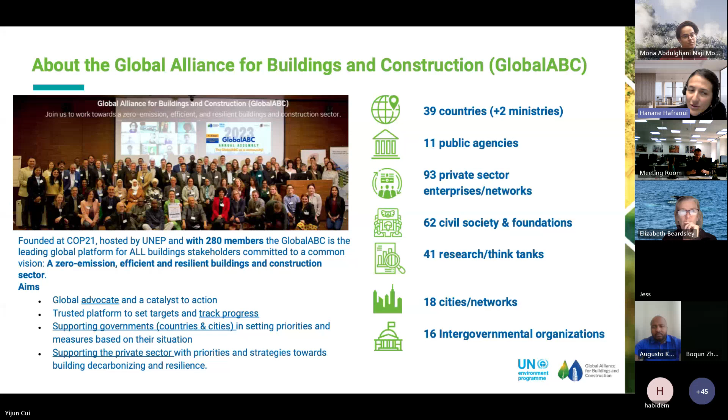Thank you, Hanan, and thanks everybody for being here today. I'm happy to be here talking with you about building materials, and just to make sure we're all starting from the same place: why are we talking about building materials? As Hanan mentioned, the sector contributes quite a lot to the emissions. You can see here we have about 37% coming from the building sector of emissions to the global carbon emissions.

Both operational and embodied. Embodied emissions are about 10% right now, and we are moving towards decarbonizing the sector. We are focusing quite a lot on the operational emissions, but we need to also decarbonize the embodied emissions, and that means we need to decarbonize the building materials.

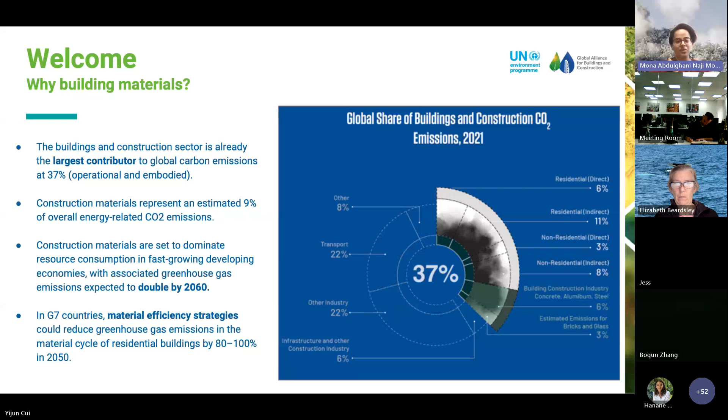And so this would include quite a lot of work, but with that in mind, on the next slide, you can see that the GlobalABC works with the Materials Hub to work particularly on decarbonizing of the building materials. And what we do mostly in buildings is really about knowledge generation, dissemination, and implementation.

And the next thing is you'll hear quite a lot about the Avoid, Shift, Improve framework to construction materials, so we'll be going through that. But I also want to flag that in our conversation, we are not only talking about the climate, we are also talking about a just transition. We're talking about health concerns, economic and social concerns, and solving these considerations, including as well the integration of biodiversity.

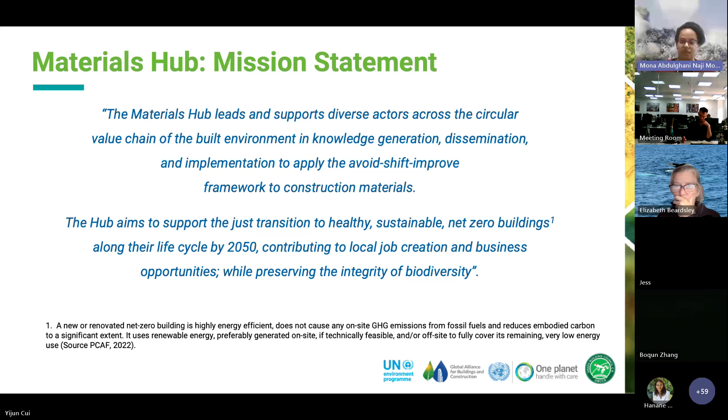On the next slide, you will see that the Materials Hub work looks at about 4 different ways of doing things.

Next slide please. There you'll see that we do quite a lot of ad hoc training, and it's really about setting a unified vision for all.

Sorry, I see there's a note in the chat about the clarity of the voice. Can you hear me okay? Okay Mona, I think the connection is not that great, it's the Wi-Fi I think. Let's try and fix that one second.

All right, so I think that fixed, but let me know if that still persists. I think we should be able to...

Vision for all the actors in this sector, and then to advocate and identify synergies between the different actors, to ensure that our work is aligned with the SDGs, as well as to identify and pilot solutions and tools and educating the community around that.

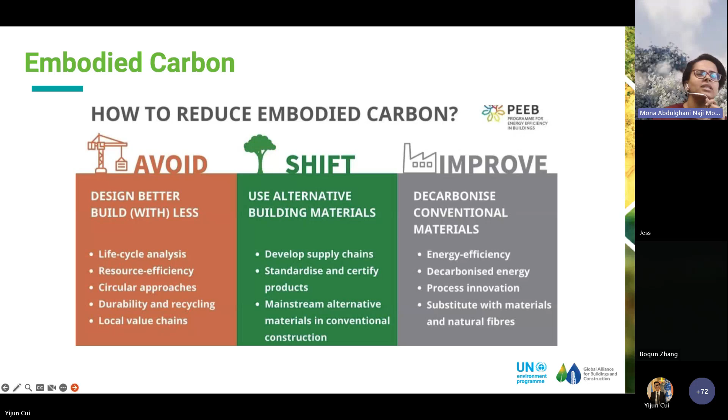So on this work, in the next slide, you'll see that the Materials Hub focuses their work in 3 areas that align with the Avoid Shift Improve framework. The first is the work on a circular built environment that we do with the Ministry of Environment in Finland, RMIT University, and Habitat for Humanity.

The second is focused on a whole life cycle policy approach to buildings, which we do with the Department for Energy Security and Net Zero and the World Business Council for Sustainable Development as co-leads. The last one is focused on bio-based materials, where we work with the Center for Natural Material Innovation and the Center for Engineers in Argentina.

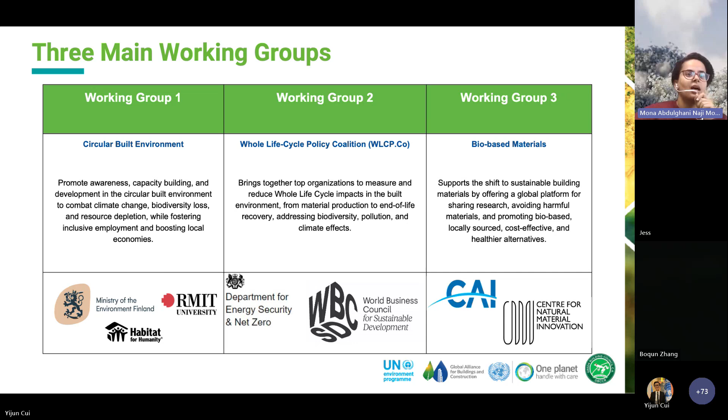For starters, we have an upcoming webinar that's going to focus particularly on data ecosystems for near zero emissions and resilient built environment. At the same time, we're also working to put together a compendium on bio-based materials, and we've already put out a call. So if you yourself are also working on bio-based, and that also includes geo-based materials, please feel free to share with us.

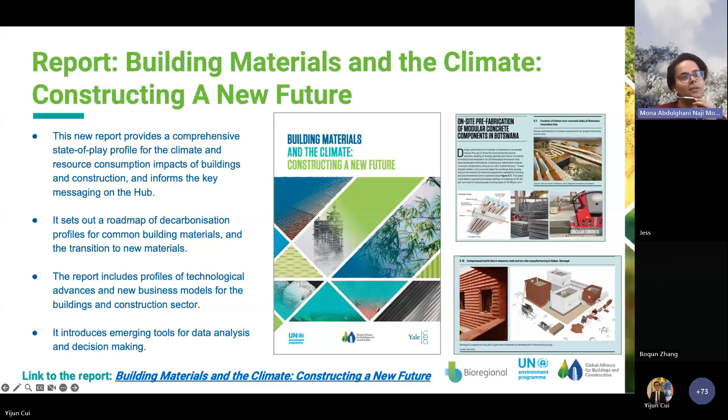This is also the link to the report for you to take a look. On the next slide, you'll see some of the key messages from the report. The main one being that building materials are set to dominate climate change, and that's why we think this work is useful, because it's going to help us reduce the emissions of these materials.

Between 1995 and 2015, the share of emissions from producing building materials alone grew from 15% to 23%, and it continues to grow still today. So if we continue under a business as usual scenario, the share of embodied carbon emissions from buildings and construction, which is mainly going to come from building materials, is actually projected to double by mid-century.

So that's where this work is looking at. On the next slide, the idea is that we are going to look at the carbon impacts of these materials across the whole building life cycle, working with different actors. Here you see a visualization of sources of embodied and operational carbon.

You can see the life cycle stages highlighted here, and the key message being that the decisions we make earlier in the life cycle of these buildings are the decisions that have the highest impact as we move forward.

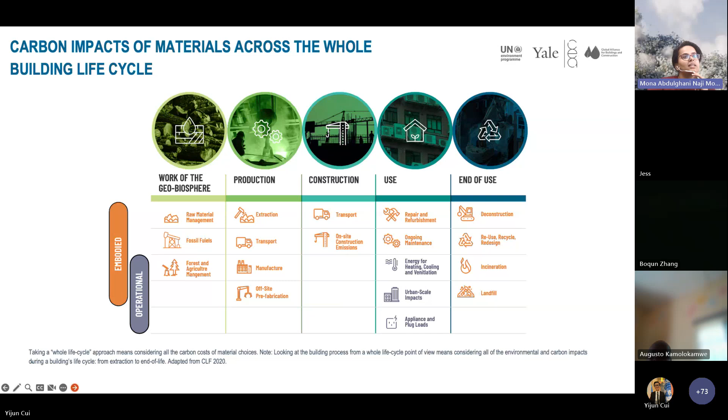Finally, on the pre-last slide, you'll see that we are talking about this avoid, shift, improve strategy. That's the goal we're trying to move to by 2050 and 2060. There is no silver bullet to where we are today.

So making sure that we are avoiding waste and building with less, and avoiding the extraction and production of raw materials through galvanizing a circular economy, which means we use better data-driven design and strategies such as designing for disassembly, which could decrease about 10 to 50% of GHG emissions, while maximizing the reuse and recycling of buildings.

Renovation right now, for example, generates 50 to 75% fewer emissions than new construction. At the same time, when we're looking at shifting to regenerative material practices whenever possible, we still have to make sure we're using ethically produced low carbon, geo and bio-based building materials.

That could include everything from sustainably sourced bricks to timber, bamboo, agriculture, and forest biomass, helping to incentivize biodiversity as we do that. This shift towards properly managed bio-based materials can also lead to compounded emission savings of up to 40% in the sector by 2050 in different regions.

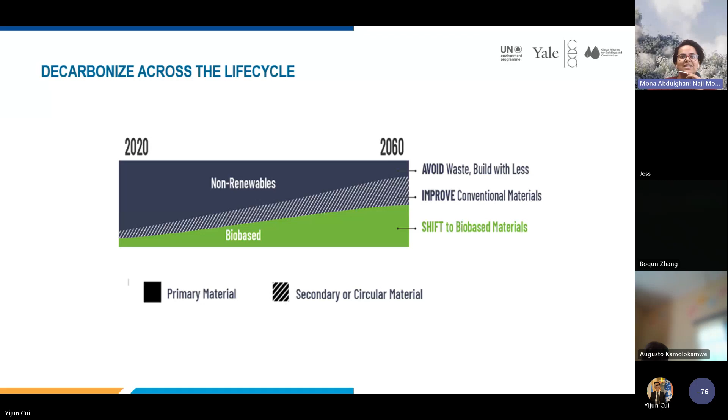Finally, we have to improve conventional building materials and processes through decarbonization efforts in production and increasing recycling. In the next slide, you'll see the same figure of avoid, shift, improve, but this time looking at a variety of different materials. This is one projection of where we could be moving into 2060.

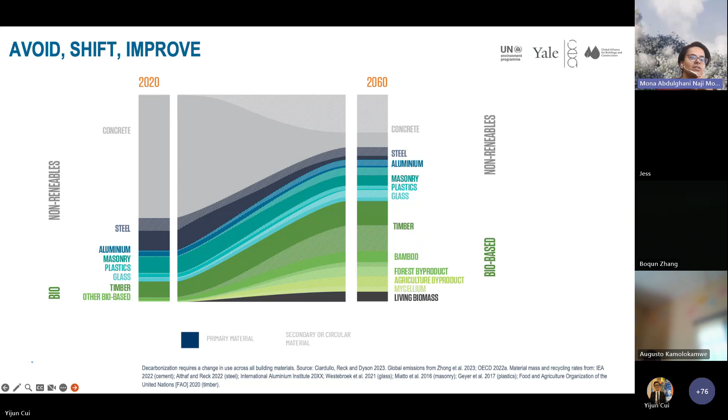So last but not least, we're focusing on the shift strategy in the final slide. We are looking at shifting towards different building materials. Today, we are going to be looking at a material that falls under earth masonry.

Just to flag overall, earth masonry is a high quality and low carbon material that still requires development and adoption of local standards. That means there's still quite a lot of work that needs to be done at the building codes level and the standards we're looking at, so we can promote and scale the high quality earth masonry use in the sector.

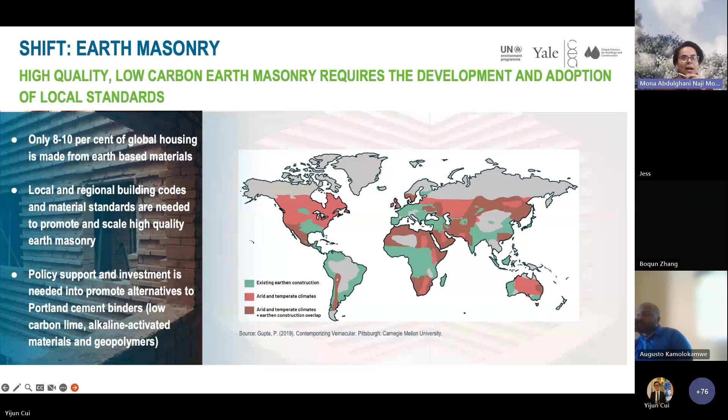Many thanks, Mona, and thanks also to Hanan. Your introduction and description of the work of Materials Hub and GlobalABC is a really good context setter for what I'm going to be talking about today. So just while I share my screen, let me get the slides up.

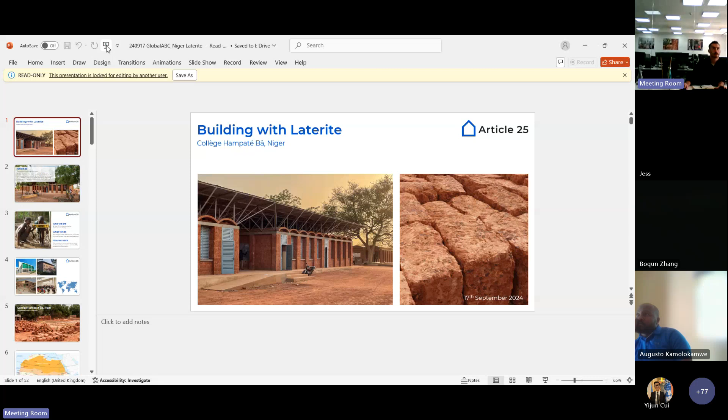Hopefully that's visible to everyone, but someone please flag if not. So I'm going to be talking about a project I've been working on for the last four to five years with Article 25. That project is at Collège Hampaté Bâ in Niger, in West Africa, and it's an interesting example of material use.

So there's this kind of stone called laterite that we use to build the building from, but also in terms of passive design, the way that we use first principles in the design to reduce reliance on aircon specifically, and the power usage and the operational carbon that accrues over time in future.

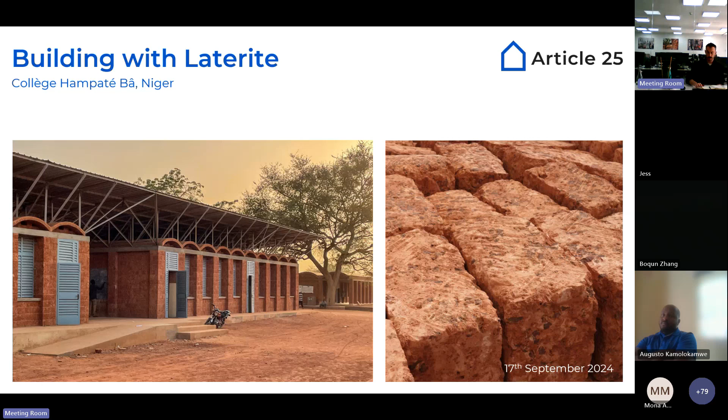So first off, a very quick introduction to Article 25. We're an architecture office, we're also a charity, and we're based in London, and we work in humanitarian development around the world. The name comes from the UN's Declaration of Human Rights, which pertains to every person's right to a standard of living adequate for good health and well-being of themselves and family, and that includes shelter as well as clothing, food, medical care.

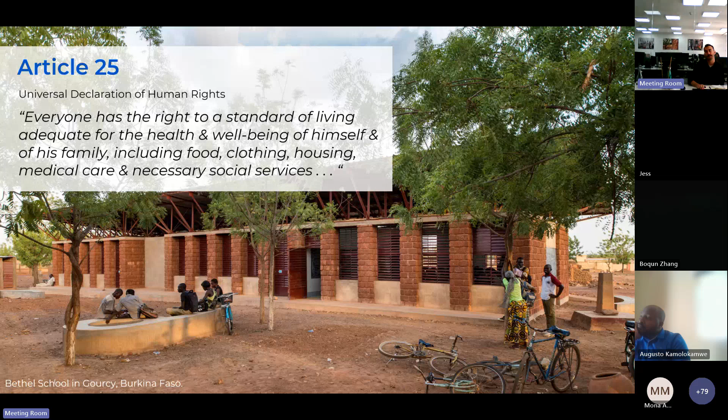So all of our work focuses on those things in one way, and many in several ways. As I mentioned, we're a humanitarian architecture charity. In practical terms, we design and then project manage the construction of healthcare facilities and educational facilities, and sometimes also housing in places where they're greatly needed. Whether we're working with a primary school in rural Africa, or whether we're working with the UN and government bodies, we always have a very close relationship with the community that we're building for.

We don't parachute in ideas that we fancy that day of the week. All of our projects are really derived from the people who are going to use the buildings.

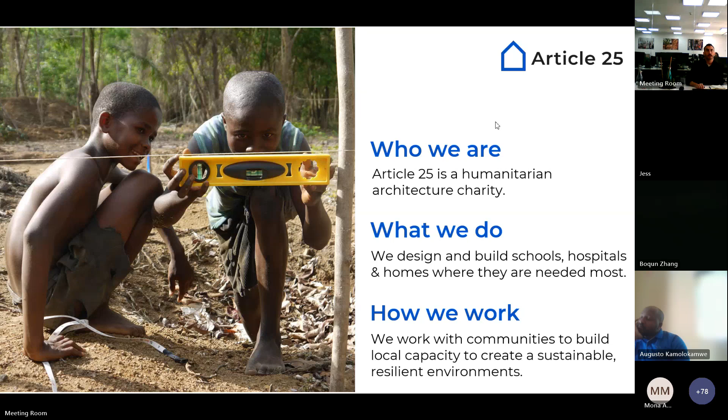So Article 25 has been working for nearly 20 years now, since 2005. We've completed over 100 projects. These range greatly in scale.

Just to give you some examples of things we're working on at the minute, we have a new national hospital in Montserrat in the Caribbean, outpatient buildings in India, orphanage buildings in Tanzania, a kind of high-tech research laboratory in Nepal. So our work really crosses from really small scale things to larger, and each presents its own challenge.

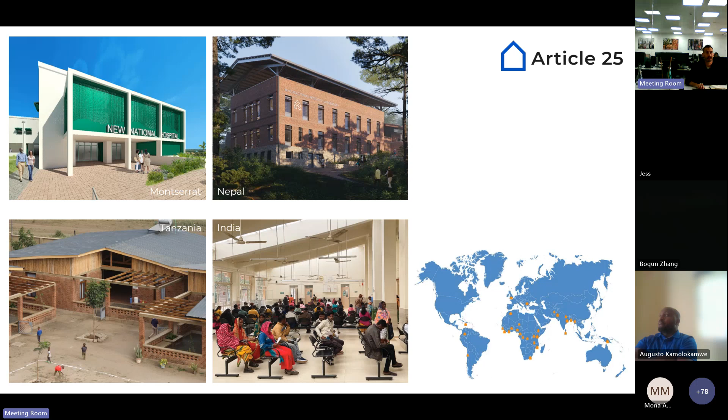The one I'm going to be talking about today is interesting for a number of reasons. As I've already mentioned, we're using this material laterite, and very early with the client, we made a few decisions about this project, and we wanted it to be an exemplar project, one that in certain ways we hoped could be emulated, not just in Niger, but across the Sahel region.

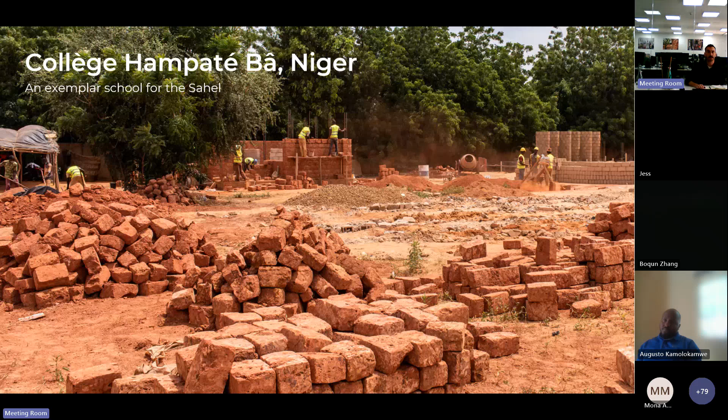That's the kind of arid southern parts of the Saharan desert in West Africa. And we wanted it to show ways of reducing the carbon use in buildings and also improving the climatic performance, so that the building itself would be a more comfortable place and use less energy operationally. So, these are grand aims, and I think in some ways we succeeded. In some ways, we've got a lot to learn. I'll come to that at the end.

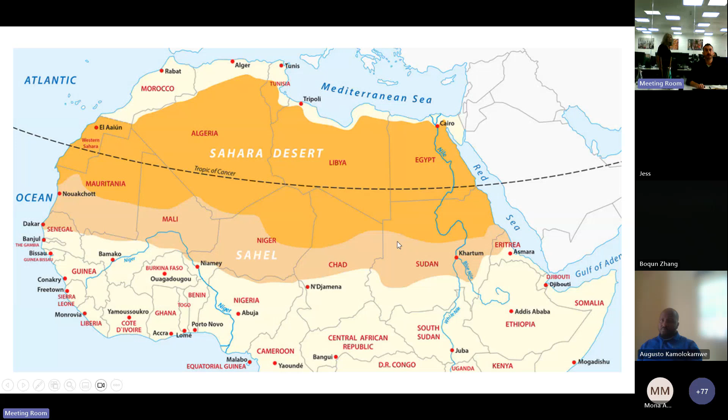So the Sahel is this band of land that spans the whole width of Africa. Sahel is derived from an Arabic word meaning coast, and it's figuratively the coastline that borders the dry Sahara to the north and the tropics to the south. So it has very particular characteristics - it's very dry, very arid. It's quite hot, but it's also more temperate than the desert above.

It's a relatively young city, so it really grew over the last 100 years. Initially, there were fishing communities along the Niger River. Then in colonial times, the French set up cantonments there. And from that, a city kind of grew up over the last 100 years, and it's now swelled to over 1 million people.

There's a big dynamic of rural to urban migration, as there is in much of the world. It's a city that's quite remarkable in my experience. It has a very rural feel, even though it's a city of over 1 million people. You see people rearing their animals and selling their wares at every corner, really.

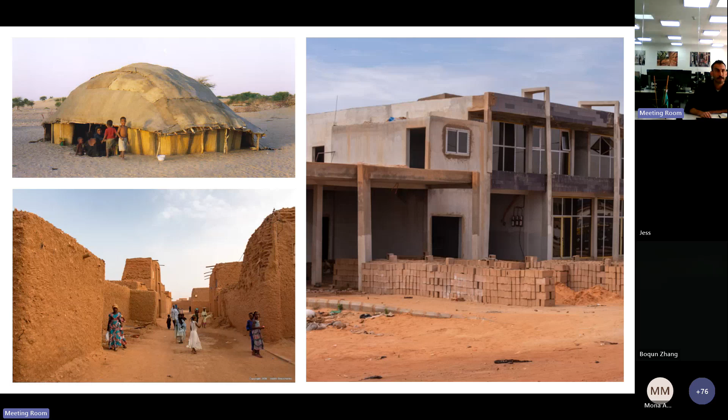These big panels of glazing without protection are completely inappropriate for a Sahelian climate. They're going to create very hot interiors that will need air conditioning when power supply is unreliable. You can see what happens very, very fast.

So it poses big questions - as an architect, as a development body, how do we address these challenges of a very, very challenging climate, a nation that is not well industrialized? How do we build for Niger today? What's an appropriate way to build?

These are questions I don't necessarily have all the answers to, but I'll certainly make the case for laterite as a locally available natural building material. It has many benefits in my view, both in terms of the obvious environmental pluses. Its embodied carbon is very low. Transport carbon is very low.

It can be dug out by hand. You don't even need machinery. This is a really, really low carbon material. There are no emissions related to its use.

There are also benefits economically. When you have a locally available material, it reduces reliance on international networks and importation. This became very clear during this construction when COVID hit. The cost of steel went through the roof - we couldn't even procure any for months on end. The building process stopped, whereas if you're able to build with local materials, those risks are hugely reduced and costs are much more controlled.

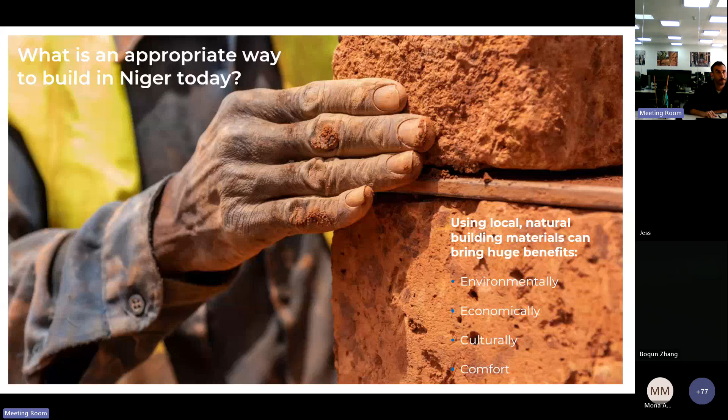So a little bit more context. Niger is a poor country. It's been bottom of the UN's development index for many of the recent years. Very few students enroll in further education. This results in a low literacy rate and a very high birth rate, over 7 children per woman, which a couple of years ago was the highest on the planet. And this is a cycle - the more children there are, the harder it is to educate everyone, and so on and so forth.

So providing good education and comfortable classrooms is clearly a really, really vital factor in improving life for Niger's young generations.

So we were invited to work with Collège Hampaté Bâ. This college already existed - these buildings were built back in the 2000s, and these are classroom buildings. Collège Hampaté Bâ is providing education for everyone, so it subsidizes school places for those families that can't afford to pay for them. And they came to us asking for help in expanding their facilities, providing for up to 1,200 students.

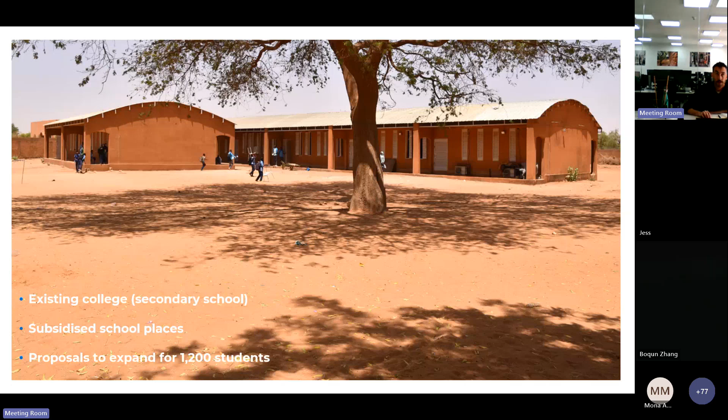So we spent a lot of time building a team to do that. The way Article 25 works for projects like this is, where we can, we pull in pro bono engineering in London, so we did that for this project. The structural engineers and the services engineers were providing their input for free. And then we collaborated with Kodjo, who's originally from Ghana but based in Burkina Faso, and very familiar with Niger after years of working there too, to be our project architect and site manager. And then a contractor, again from Burkina Faso - the reason for this was for the use of laterite, which I'll come to shortly.

The design was developed in close collaboration with the school, the students, and the teachers, really figuring out what they needed, what the priorities were, and what didn't work well with their existing classrooms. Clearly the problem of heat and discomfort in the classroom was a focal point - it gets really, really hot. I've been there in April time when it's been 46, 47 degrees, and it's really hard to think or work effectively in those kinds of conditions. Students and teachers both brought this up repeatedly.

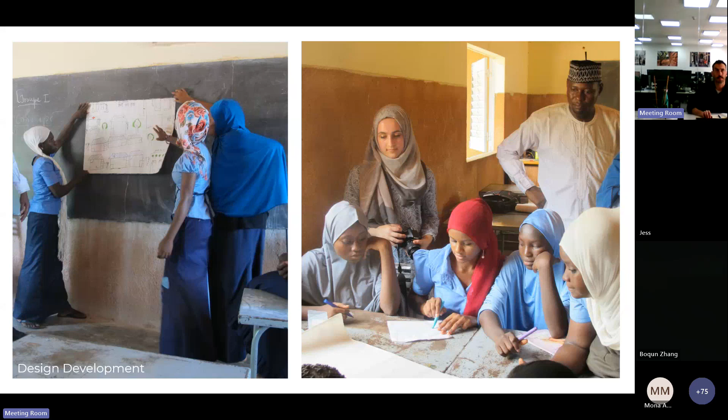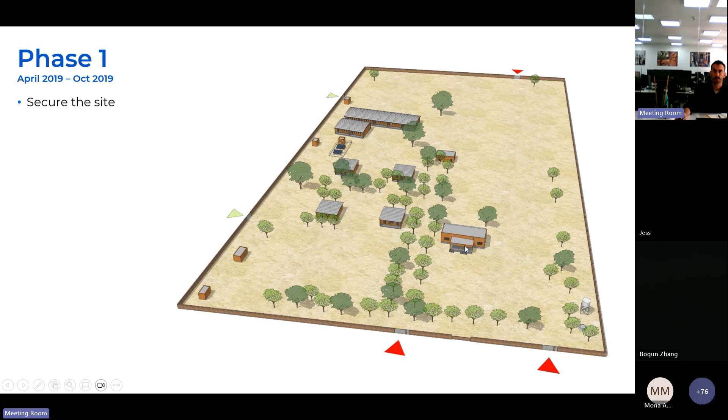So in the spirit of keeping the buildings you could, we came up with refurbishment proposals for those existing buildings. Then, in terms of expanding, we designed new classroom blocks for the lycées, so the older college students, as well as an upgraded water and electrical supply, new latrines, a guards post, and a few more office spaces for the staff. So this was the scope of the project.

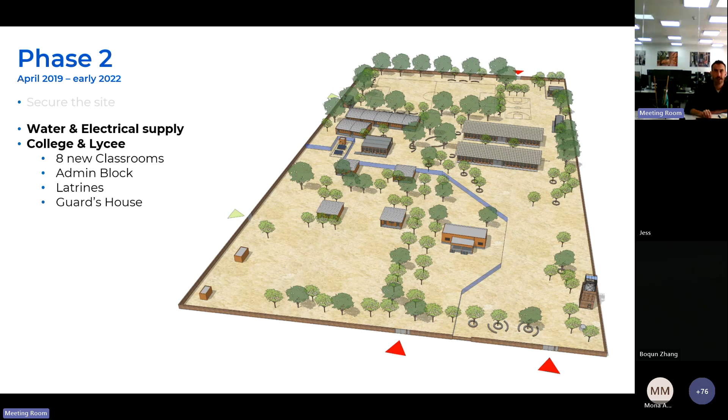It was started on site in 2019, and then with COVID providing all sorts of delays, we wrapped up most of that in early 2022. There are designs in place for much bigger expansion - for the primary school, a science lab, assembly hall, library, and lots of landscaping. That's all currently being considered by the client, and they've got questions about what they want to do and the funding and all sorts, but that has yet to happen.

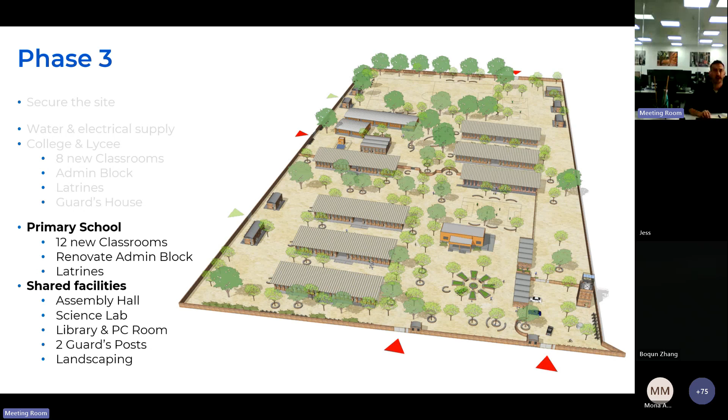So onto the passive design. This is not something we dreamt up ourselves - it's derived from a tradition of building double roofs in the region, but also popularized by Francis Kéré, who many of you may know. He's a Burkinabe architect, and he's been building schools in Burkina Faso using variations on this technology for years.

The principle is to provide a roof space between a large overhanging shading roof, which here is in metal, and a lower ceiling. By angling this roof to the prevailing wind, you can draw airflow through. When the hot sun hits the top metal roof, you prevent it radiating into the classroom spaces by drawing the air through, having a ceiling to soak up - ideally with some mass - some of that radiated heat.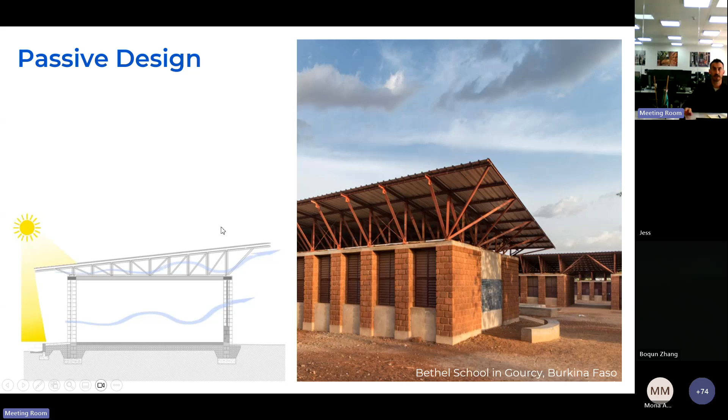And then you also have lots of openings in the classrooms themselves, which encourage cross ventilation. This also seems to have some impact on pulling the air through the roof space as well, which heightens the effect of the double roof and keeps temperatures as low as possible in the classroom. Our classroom blocks were very simple in plan - they were blocks of 4 classrooms with a shaded study space in the middle.

Keeping the design quite simple, so it wouldn't be too complex for construction, but we had these walls which we wanted to build in laterite on a plinth kept off the ground because there were problems with flash flooding. So you want to keep this laterite well away from water, which it wouldn't do so well in.

Then the roof is tied with a concrete ring beam. So we're using concrete and cement where we need it, but minimizing its use to essential moments, as Mona alluded to. Above the concrete ring beam, we have earth brick vaulting, supported on that ring beam and on the bottom of steel trusses, with a metal sheet roof on top. So we've got metal sheet roofing for the top roof and earth vaulting for the lower roof.

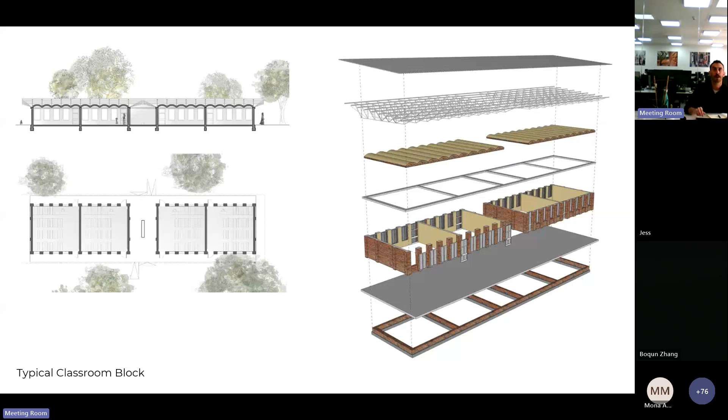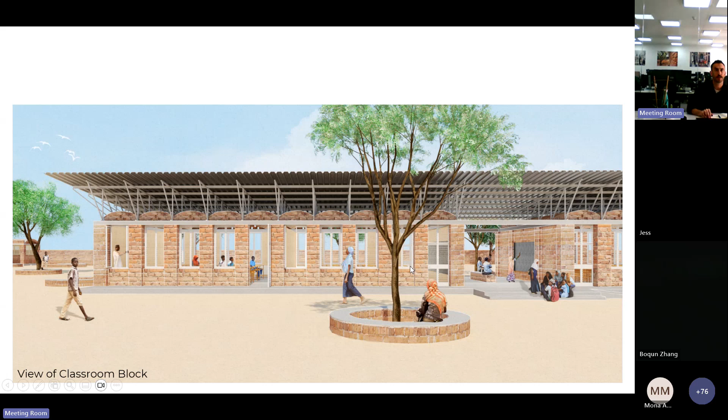You can see them here. This is a visual we produced before the building was constructed, showing those very simple building elements and the large expanses of opening windows to encourage cross ventilation.

No glass, you'll notice. This is a cut through of one of the classroom blocks, again showing those simple elements: laterite walls on the outside, the concrete ring beam which ties those walls together, thin reinforced concrete columns hidden in the laterite walls, and then earth for the ceiling, steel roof structure with a metal roof above.

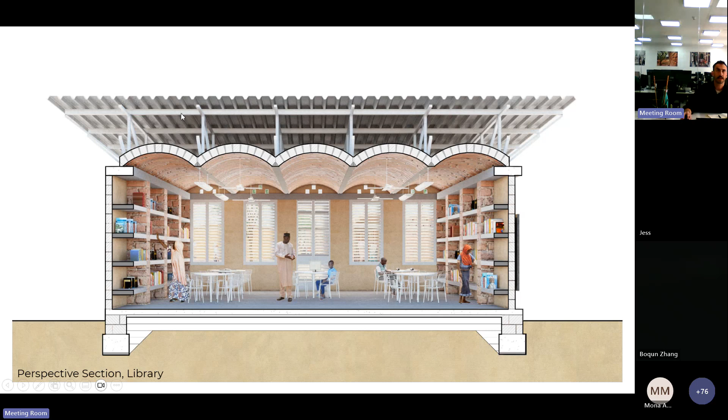So onto the laterite. Laterite is a material that we haven't found much evidence being used in Niger, whilst it's popularized in neighboring Burkina Faso and Mali, and it's being used quite a lot for schools. For some reason, it hasn't caught on in Niger.

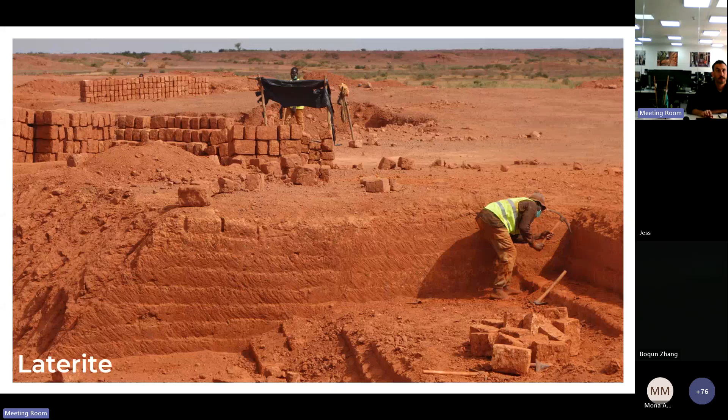So we wanted to use this opportunity to show what could be done and hopefully trigger a shift away from cement block schools and chunky reinforced columns to something built in laterite, which you can expose and use as a facing material as well.

It happens where tropical climates create this cycle of very hot weather and then very intense rainfall. They seem to be the kind of conditions where it forms. It often has this red-orange color due to its high iron content, a lot of aluminium and iron content. This varies a lot region to region, so it always looks slightly different depending on where you dig it out of the ground.

It's very porous, as you can see from this image, so it fills with water underground, and then when you take it out of the ground and dry it out, it hardens as that water evaporates and is taken out of the material.

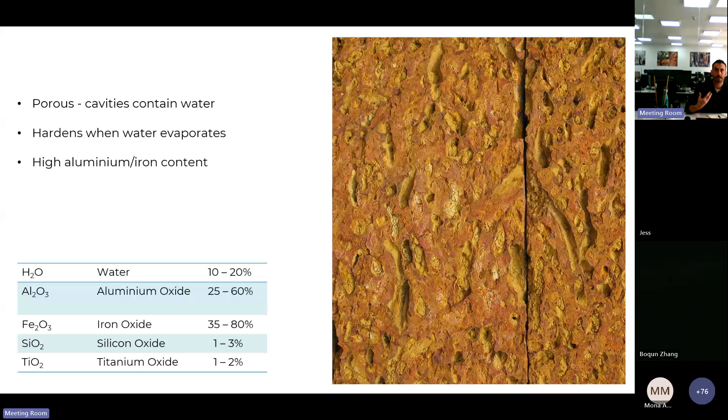I haven't found so many examples of historic use in Africa, although it's certainly been used in Ethiopia. This is, again, hundreds of years old. Some of the temples at Lalibela are from laterite stone. If anyone happens to know of more historic uses, I'd really be fascinated to hear. So do reach out in the chat.

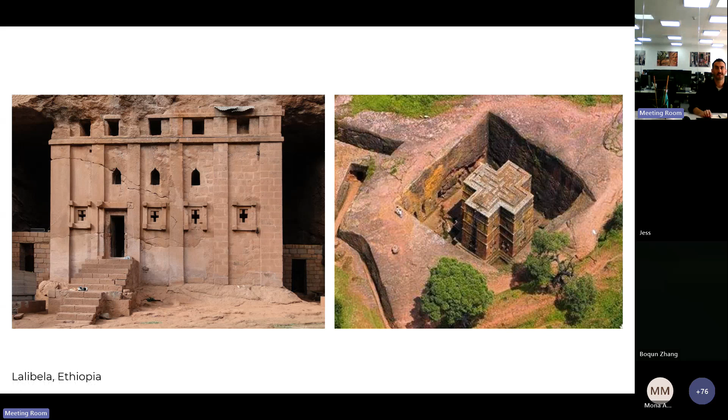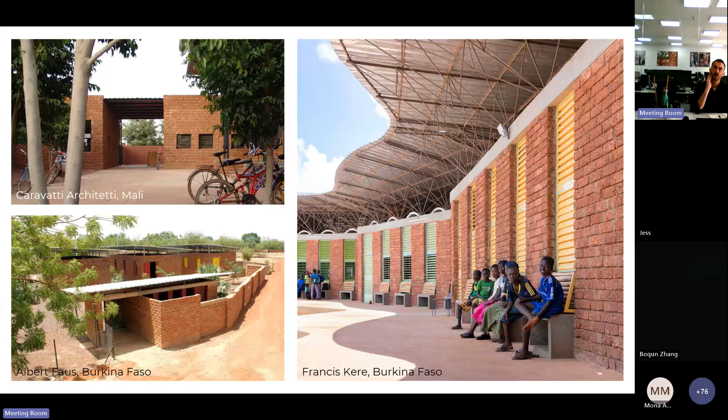But there's been an explosion of architects promoting the material, notably in Burkina Faso. I've already mentioned Francis Kéré, but other African architects and European architects working there have been using it too. This has also spread in Mali as well. And so there are some beautiful examples of its use. We were really being inspired by this and trying to bring this movement to Niger, as it were.

Now, it's sort of an obvious point to make, but there are huge advantages in terms of embodied carbon. Fired brick is a wonderful material in many ways, but it is extremely energy intensive in its production. You have to fire kilns to the best part of 1,000 degrees to fire bricks, which makes it a really problematic material in terms of carbon usage.

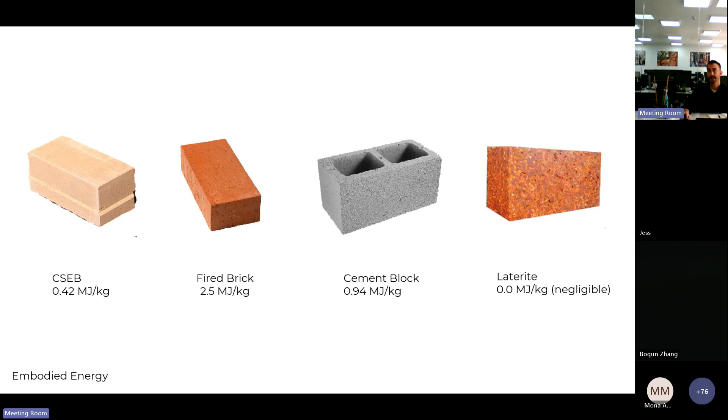Cement block obviously has Portland cement in it, which is again highly energy intensive in its production. And in the case of Niger, you often have to import it from Nigeria, Togo, or Benin. Even compressed earth blocks, which in some locations I've been a huge advocate for and love to use, generally need some cement content, even if they're hand produced. So that increases the embodied carbon, whereas laterite, in the way we were using it, digging it by hand just a few kilometers from the school, its embodied carbon is zero or negligible.

As there's no established use of it in Niger, we really spent a bit of time finding suitable laterite to use. So this is our site team. Our Article 25 architect, Kodjo, is on the right. Our contractor, Sauter, is on the left. And in the middle is Benjamin, who is very experienced in building with laterite in Burkina Faso.

He spent a few weeks testing various spots around the outskirts of the city for laterite that was suitable for building. A lot of it's quite friable and not really strong enough to use in a building. But he eventually found this site, and as soon as he got out of the car, he was pretty confident and said, this will be the spot. Apparently it was just the nature of the foliage growing on the site—he recognized it as somewhere good laterite would come from—and also the way the rain was running off the surface. As soon as he saw both of those things, he was certain that would be a good site to use, and it proved to be correct.

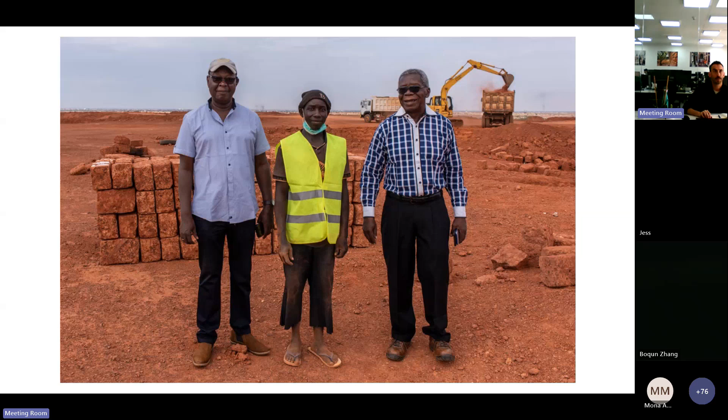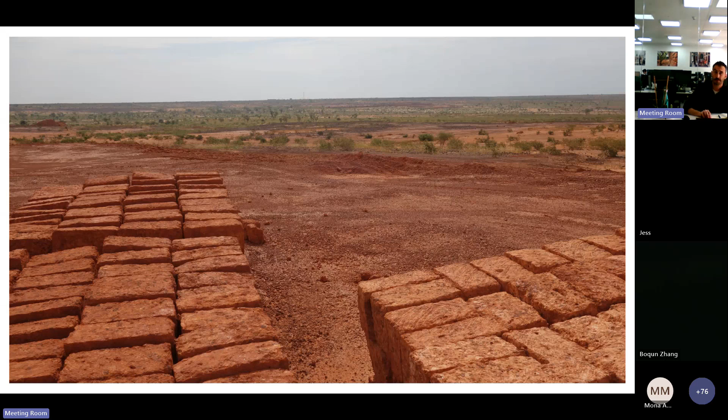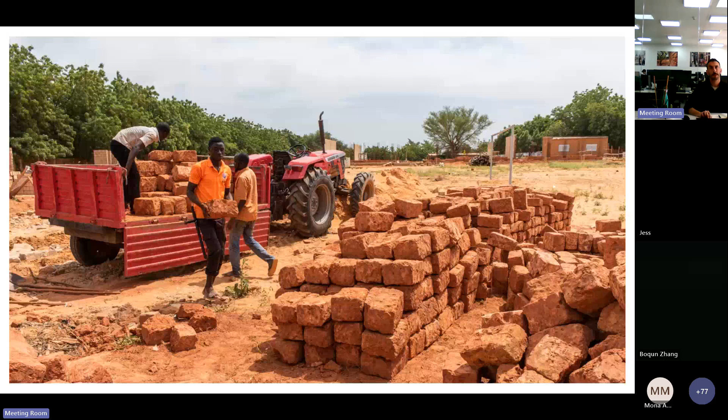So the entire school construction is built using laterite from this very spot. All of it was cut out by hand. These guys cutting it out by pickaxe, they cut out the rough blocks, and then stack them in the sun for at least a month for it to start drying out and harden. Then they were driven by this tractor to the school—it was under 10 kilometers, I think—where the masons on site would shape the blocks. They would neaten them up using hand tools ready for use, and then put them onto the building.

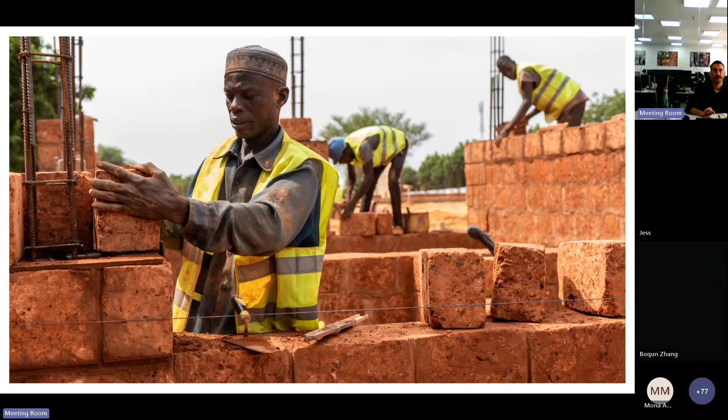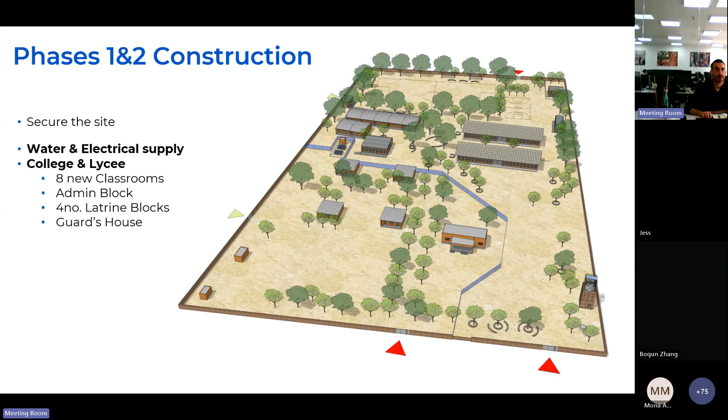As soon as we saw these blocks, as an architect, you're thrilled. They're just beautiful. You get this incredible texture and mix of colours on the blocks. So I'm just going to flick through a few pictures. I don't know how many of you are design or architect based, but I'm going to flick through a few pictures of the construction itself, just to show you how it went.

Because we built with laterite in Burkina Faso, but we hadn't used this exact block, we used the guard's house as a kind of test bed, trying all of the masonry and testing if it worked first before going on to the classrooms, and it went pretty smoothly. So this is the guard's house going up, and then onto the classrooms. It was really very fast to build with.

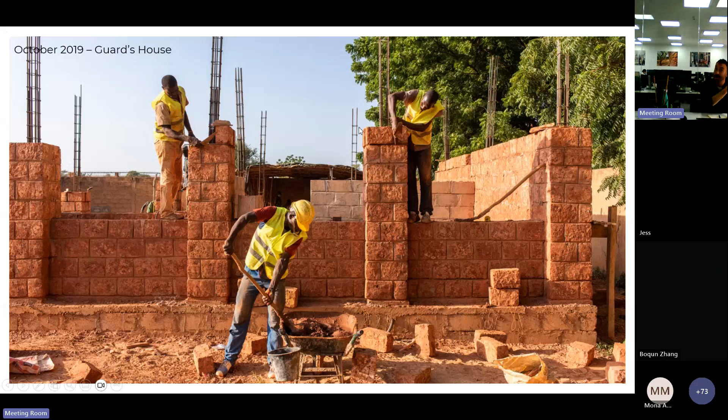And here we're up to the roof, so the vaults are going on. Initially we wanted to use laterite for the vaults as well, but they proved quite difficult to do with the blocks—as soon as you got the blocks small enough, they weren't really stable enough. So we opted to make our own earth bricks with a small amount of cement to do the vaults. These were all made on site.

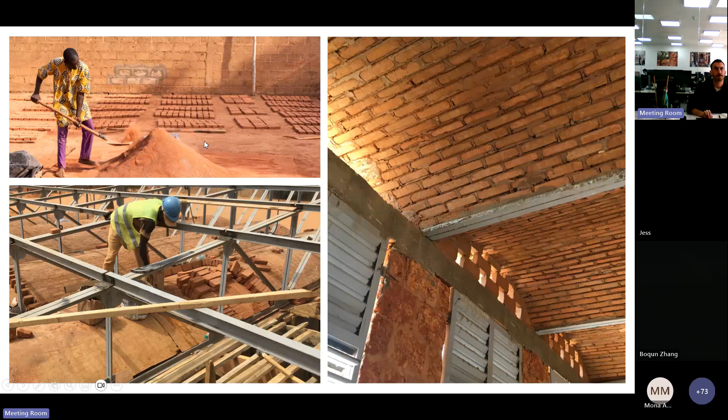With a kind of 4 or 5% cement addition, just to make them strong enough. Again, we were using lateritic soil, so some of this soil came from the same site, just from the topsoil, so that the colour would match. And here you can see the vaults once they were completed.

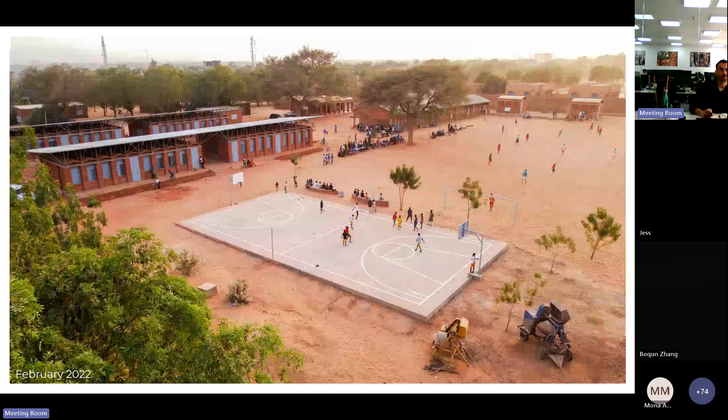Really nice. The classroom blocks were finished in early 2022, and I think the first block was finished a year or so before that. So they've been in use now for 3 or 4 years, and broadly been a great success.

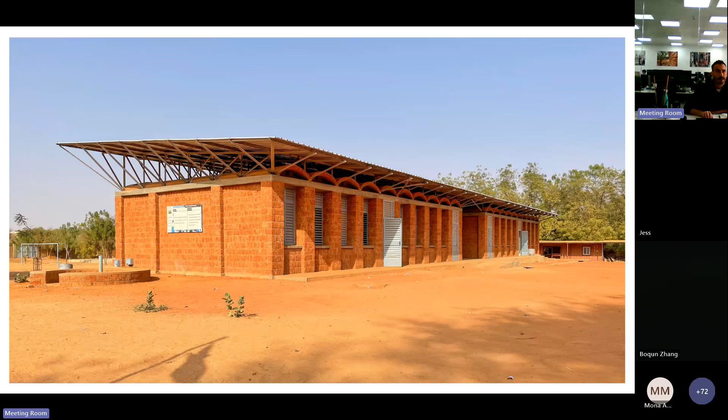Here are the students outside, and a complete block there. You can kind of see it was very similar to those initial visualizations.

Here's some more shots of the finished classrooms in use. This is the shaded part where kids use it after hours as a kind of homework spot. Many don't have much cool shaded space back at home to use for study. So I think if we design this again, we'd expand these areas, if anything.

But we use laterite in the buildings as well. Because the steel is by far the most expensive part of the buildings, in those buildings where you don't have such density of use - the classrooms are full of 40, 45 students, but in the guards post and the latrines you don't have that many students, so the heat generated by use is much lower - we decided to get away without the steel roof and save a lot of money.

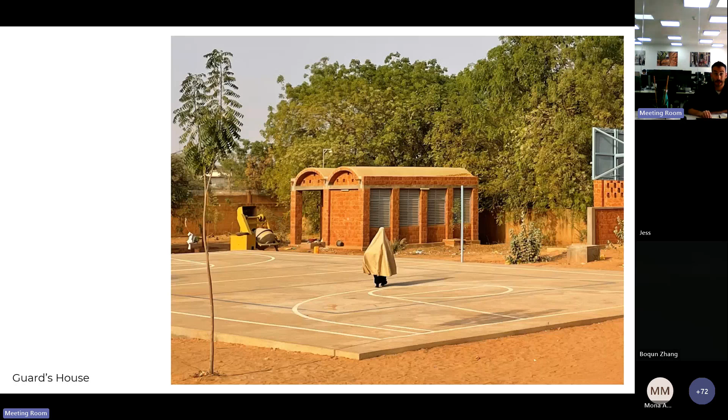So the guards post, this is the office building. These didn't have the double roof system, they just had larger vaults. You can see it's out of laterite. So here we're building the walls and the roof from laterite, which is very satisfying. The latrines as well.

And even the water tower, this had a reinforced concrete frame, but was wrapped in laterite block.

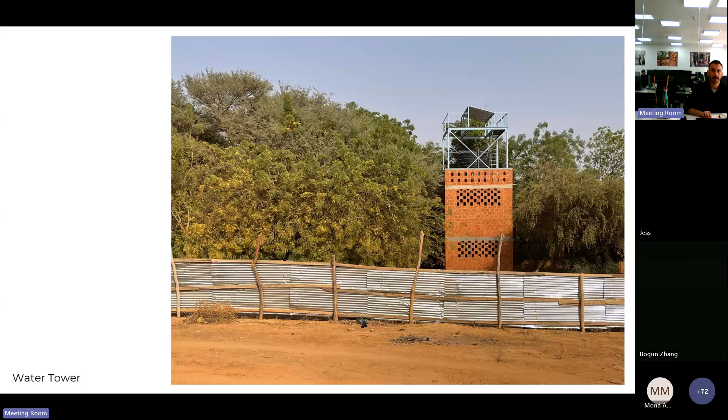Despite being quite a small charity, we've tried to use this project to learn more about the material as we've used it. There's not a great deal of study into its use, particularly in an African context. There's far more in India, where it's been used on a more commercial scale. But we did the studies we could to try and figure out just how suitable this material was.

So at least the laterite we have doesn't have great compressive strength. For a single story building, if it's well designed, it's appropriate, but you wouldn't want to use it load bearing or over multiple stories. So it's more a kind of enclosure.

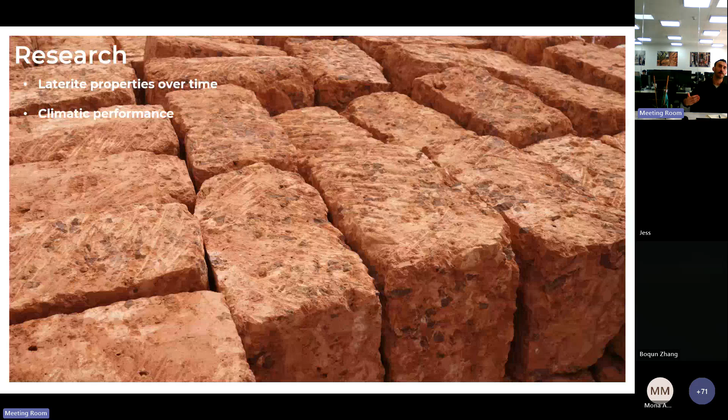But we did do some tests and tested the blocks once they'd been made over time. We saw some improvement in the compressive strength over 3 months, 6 months, a year. Anecdotally, this is the case - if you leave it for years, it becomes much stronger as it dries out and hardens. But it would be really interesting to expand this study and do it more formally, to really understand how much stronger that material could be, because that would open up more possibilities potentially.

In terms of the passive design, we got some measuring equipment from a university here in the UK to test the temperature through the day in the classroom and outside. We found that in hot spells, we were really improving the internal temperature with this double roof system - as much as 7 or 8 degrees cooler than the external temperature, which is a vast improvement. It's really, really effective.

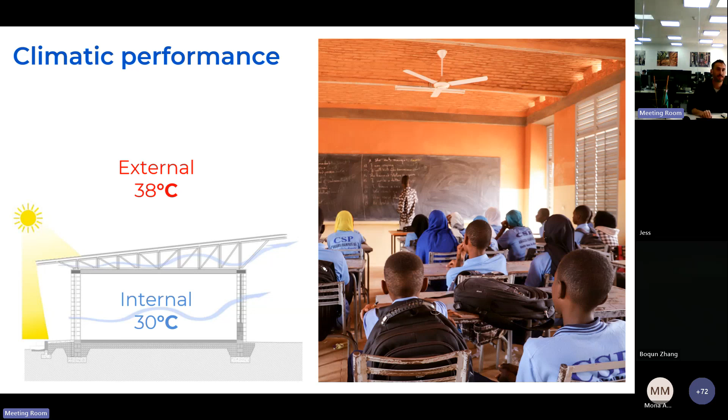That's the best case scenario. Through the morning, you would see an improvement of 2 or 3 degrees, and then by the afternoon, evening, it was often 4 or 5, and up to a maximum of 7 or 8 degrees cooler than the outside temperature, which is really considerable. That was really exciting, to get some data to back up how it feels. When you're in these classrooms, you feel it - it is much, much cooler. So that was quite exciting.

We'd also set up some vocational training with some young women, many of whom had just finished sixth form at the college.

Niger is not a place where women are generally involved in construction work, so we really had to challenge expectations. But the contractor got on board and ran training courses using the construction itself as a test bed, and it proved really popular.

It's something we wanted to build on, but again COVID got in the way. We'd established a connection with a vocational training centre that works exclusively with young women in Niger, and they were going to take this on and run more training through the latter phases. But with COVID this couldn't happen, unfortunately. It's something we'd love to try with the right project in the region in future.

I'm sure I've been talking enough, so I'll try and wrap up quickly with a few reflections and lessons learned from the project before a quick Q&A with Mona.

Laterite, I would say, proved a real success broadly. We think it's a very good alternative to cement blocks, which would be the default material for schools in Niger at the moment. It's competitive in terms of cost, arguably even cheaper. We think it looks fantastic, although that's subjective. It performs well in terms of robustness - both this school and the one we built in Burkina Faso are standing up really well a few years in. So on that front, we think it's great.

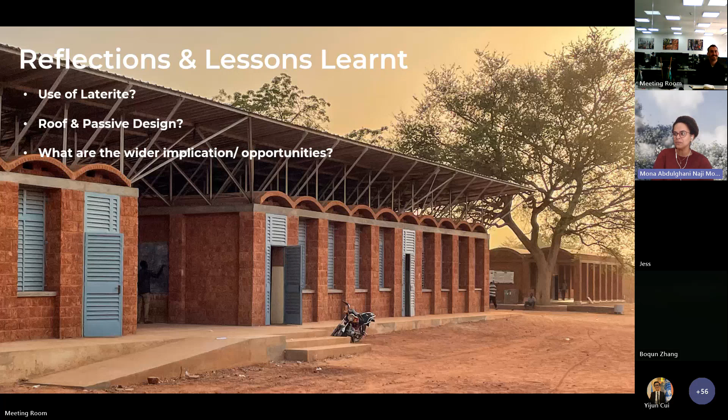I see maybe the last question, because we're running out of time. We've run over time, but I'm still seeing more questions come through, particularly on the embodied energy in laterite, the number that you brought, which was negligible in megajoules per kilogram. Is there a citation for that? Because Jigedale is asking, since they do work in India and would like to be able to cite that work.

Yeah, I'm afraid there isn't. This is a very rudimentary calculation based on the fact that it's basically what the guys ate for lunch. That's the energy going into it, right? They're digging it out and more or less carrying it to site. If we're being stricter, there's the petrol of the tractor to get it from there, but it's negligible in the grand scheme of things. There's no energy produced apart from the human energy of digging it out of the ground. That's very different from firing kilns to 1,000 degrees for days on end to burn your bricks. So yeah, I'm afraid no citation, but yeah.

So no citations yet, but we'll wait to see the next publications on this. And then again, another question: what's your extension to the hygrothermal aging of these blocks? Maybe hydrothermal, I'm not sure what hygrothermal is. Yeah, I'm afraid I'm not clear on the meaning of that either.